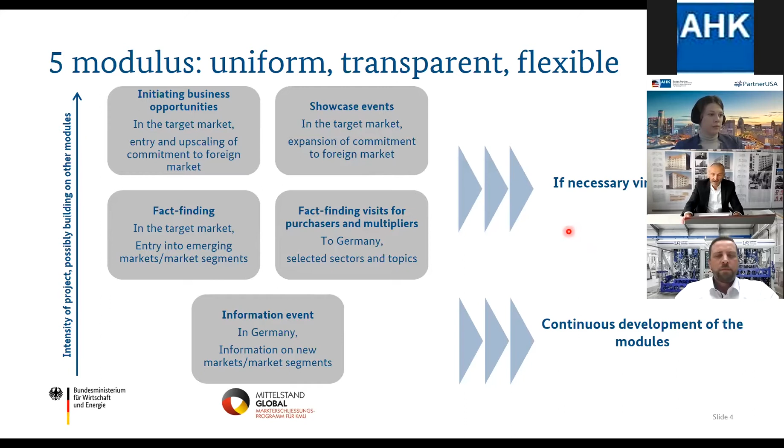If you have more interest, if you have more questions on that program, please feel free to get into contact with my colleagues in the 2 offices, and it will be a pleasure for them to help you and to give you the required information.

So let's move on to the second part of my presentation. Now it's about lightweighting, the major part of the presentation. Of course, the Corona crisis is the overwhelming event for all of us in the US, in Germany, all over the world. But there are still other global trends, global challenges we are facing, and we have to tackle them, because they give us huge opportunities, especially regarding lightweighting.

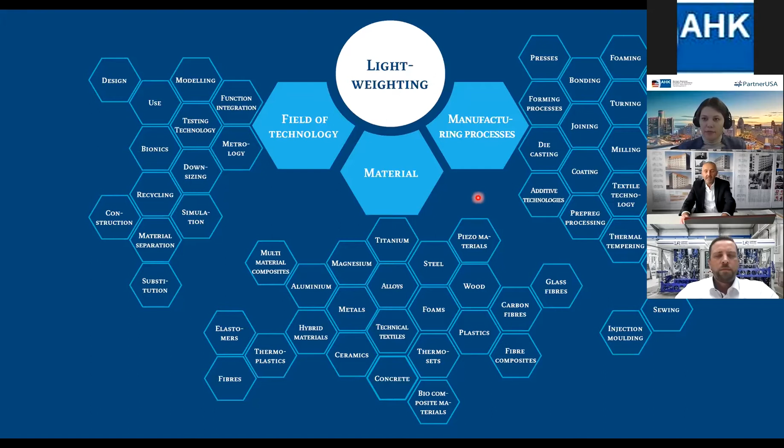So bringing all these different stakeholders together with the different backgrounds they bring in, that's not a self-fulfilling story or promise. Hard work is needed to be done. And that's what we have done in the last years in our ministry, setting up that specific network in the field of lightweighting. So we have established the lightweighting initiative.

So the first element is the strategy group, and that body consists of different representatives of the Länder Lightweighting Organizations - there are 16, because in Germany we have 16 states - and they send one representative to Berlin, so they bring in a lot of knowledge and experience in the field of lightweighting. What is as well very important is that with these guys from the state level we have the opportunity to combine the federal and the state level, which is very important for us.

On the other side, you find the representatives of industry, unions, and associations, and they bring in knowledge and experience in the field of lightweighting, representing the different materials we use in the field of lightweighting - composites, steel, wood, aluminum - all that is represented here. So we have the chance to build up an idea of a hybrid, a multi-material lightweight. Yes, of course, it is a broad and complex structure, but typical for a cross-cutting industry. What is more important is that we have a strong, solid base for our political work, and that works very successfully, very well.

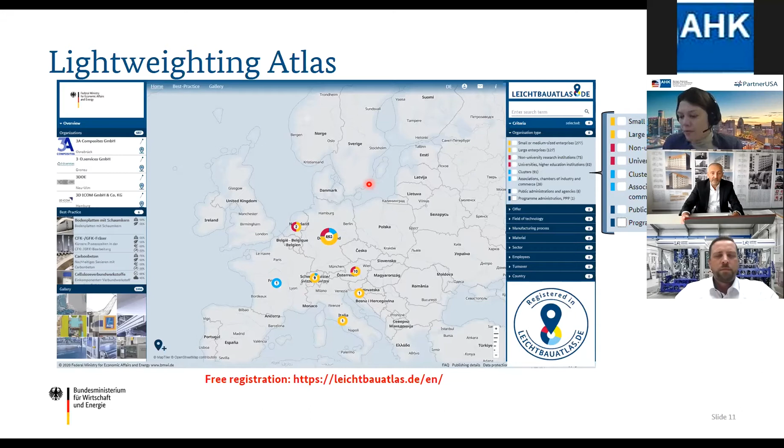The next element is a very important one: the lightweighting strategy. Our goal is to create a strategy from the economy for the economy. We set up different elements and involved about 350 experts from industry and research in this bottom-up process. We held 3 workshops and 1 final conference, which went very well — at the first workshop around 300 experts from industry and research actively took part. We generated a lot of information and incentives, more than 600 ideas and impulses, and 42 very specific actions.

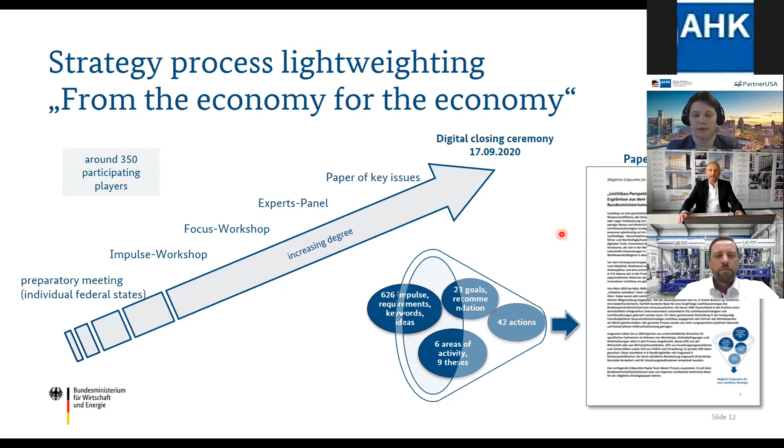The next element is, from my perspective, a milestone: a technology transfer program for lightweighting. It's a milestone because for the first time Germany has a funding program made only for lightweighting and new materials, on a very solid and strong financial base of 60 up to 70 million euros per year. There are 5 goals which are important for us.

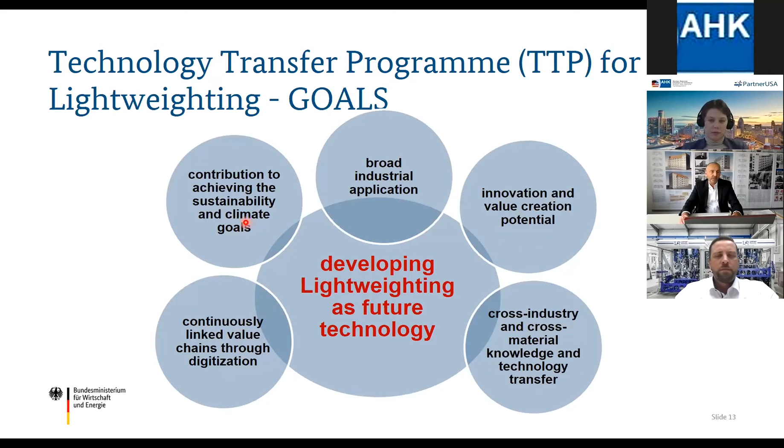The first goal is to bring lightweighting into broader industrial application. The next is about innovation and value creation potentials. The third is to support cross-industry and cross-material knowledge and technology transfer, typical for such a program. The fourth is setting up fully digitized and linked value chains. The last is an important political goal: contributing to achieving sustainability and climate goals.

So how do we achieve these goals? We have set up 5 funding lines, which you can find here. The important thing about the financing is that we get the money from 2 different financial sources. The first is, not surprisingly, the budget of our ministry, which provides 4 million euros per year, and that money goes into funding line 1, about technology development.

But the lion's share of the money comes from a second financial source, the Climate and Energy Fund of the government. That money goes into funding lines 2 and 3, CO2 savings and resource efficiency — we're talking about 60 up to 70 million euros per year. That shows, since the money comes from the climate fund, how important climate protection generally is, and how important it is specifically for the funding of this program.

There are 2 other important funding lines you can find here, for demonstration projects and standardizations. There is no additional money available for those, but they have to be able to assign to funding lines 1, 2, and 3.

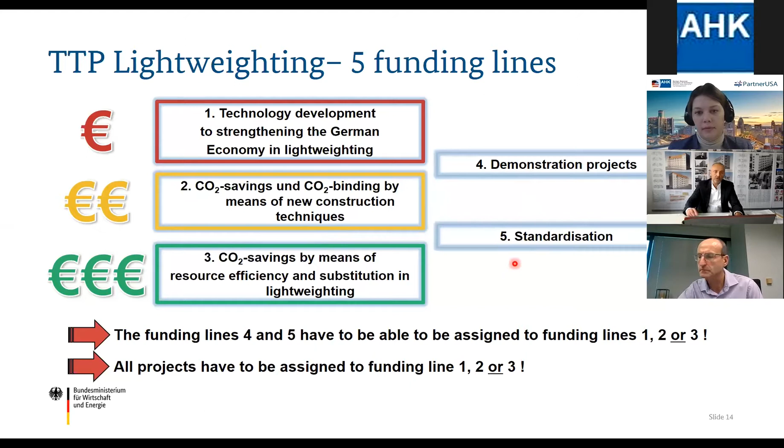So, who can be funded? Yes, more or less anybody who has a permanent establishment or branch in Germany. It is open for companies, universities, and non-profit organizations with a permanent establishment in Germany, and they can be funded for individual and collaborative projects. If you like to join our funding program as an American organization or company, it is possible, but if you have no permanent establishment here in Germany, you can't receive any funding from us.

So let me sum it up: that is a very successful and helpful funding instrument for us, and there's a huge demand to get funded from that program, so we are very happy to have it.

Let's have a look at the international level, because lightweighting is an international challenge at the end of the day. We have to improve our networking on European and international level. The first initiative I want to introduce is the first meeting of the European Lightweighting Network. That is an initiative of our ministry under the framework of the EU Council presidency of Germany, on the 26th of November. The idea is to bring together different stakeholders from business, research, the European Commission, and the different ministries in member states in Europe responsible for lightweighting. We think that's a good idea to improve networking in Europe.

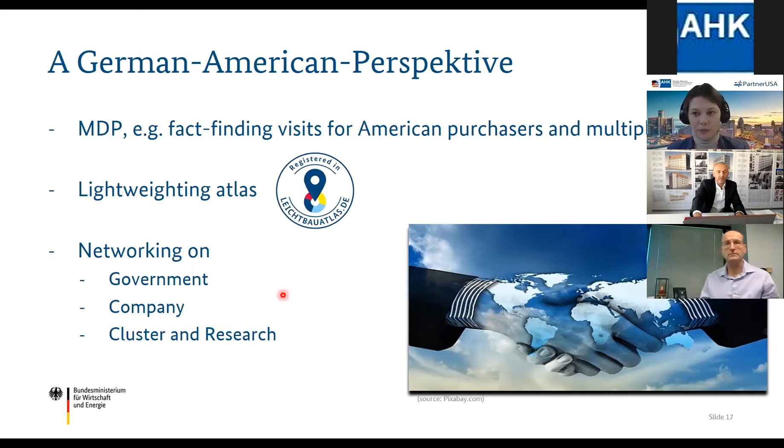So finally, let me sum it up. For us, lightweighting is a game changer technology that is important for improving, strengthening, and modernizing our industrial sector in a sustainable way. Let me illustrate that with the lightweighting principle: less weight, less energy, lower emissions, greater functionality, and better resource efficiency.

So those are the opportunities, but on the other hand, there are still some challenges we are facing. The first is that we have to establish fully digitized and connected value chains with the required lightweighting expertise on every level. The second is about reducing cost, especially for the automotive sector, but that's important for every sector as well. The third is setting up suitability for mass production, and the last is establishing sophisticated recycling processes, especially for multi-material lightweighting. That is important because we have to secure the acceptance of society and politics, so that environmental issue is important.

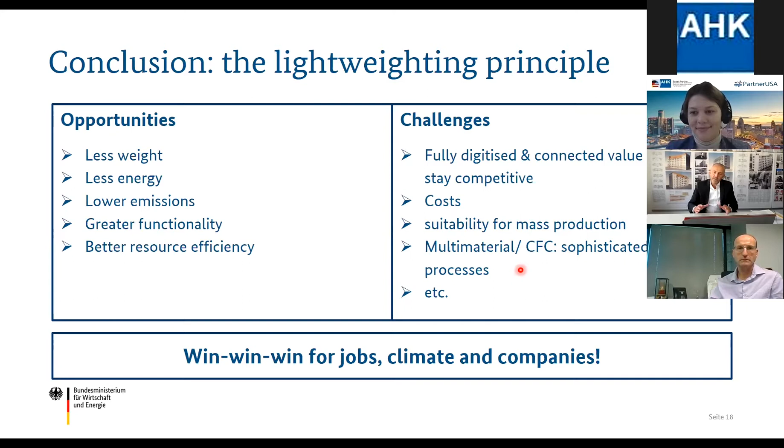And if we do so, and I'm pretty sure we will, then lightweighting is a win-win-win technology for jobs, climate, and companies. If you have more questions concerning the technology transfer program for lightweighting or the lightweighting initiative, please get in contact with my colleagues. It's a pleasure for them to help you.

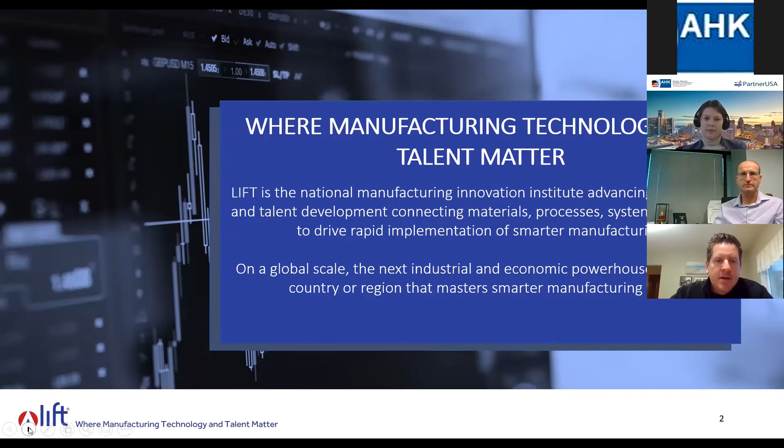So we view it as solving the manufacturing equation: materials, processes, and systems, plus the talent required to make it all happen. We understand that we cannot have the technology without the talent to work on it and drive it, and we can't have the talent there without the technology to work on.

So we operate really in 2 different programs at LIFT. The first is Lightweight Innovations for Tomorrow, that is our technology program in which we are taking technology innovations from the lab concept to the marketplace, into industry and into the hands of our men and women in the military.

We also have Learning Innovations for Tomorrow, which is our talent side, where we're really trying to expose the future careers of advanced manufacturing to our students across the curricula, the continuum, from high school and K-12 students, to folks looking to earn a certification, to returning men and women from the military to support them as they transition back into a civilian career.

So I mentioned that we focus on taking innovations from concept to production ready, and that's really where we live, the so-called valley of death between MRL4 and MRL7.

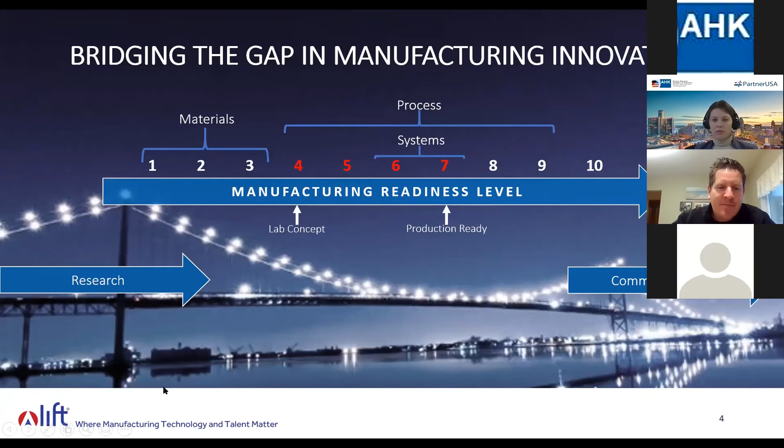We know that there's a lot of investment in research that takes place on the 1 to 3 side, happens at universities, happens at national labs, and they get to a point where they've seen some success in the lab, but then the funding dries out and isn't readily available again until it gets more ready for production into the marketplace. So we are helping shepherd those innovations across that valley of death to really bridge the gap in manufacturing innovation. So we are there between 4 and 7.

So I mentioned we are a public-private partnership, and much like Werner's presentation, we are a membership-based organization, obviously focused on the United States. Some of the things he said about German requirements, we have the same requirements as it relates to members in the US. You must either be based in the US to be a member, or have production facilities here in the US, to become a LIFT member and receive some of the funding that we're able to flow down to get some of these projects underway.

In terms of what we do for our members, we are a trusted advisor. We're not playing favorites in terms of what technology we're recommending or how we work with our members. We have experts across the country in a variety of industries, both in-house and across our ecosystem. We try to provide the best advice and direction to help particularly small and medium-sized manufacturers move in that direction.

I mentioned we're a talent developer. So we have a LIFT Learning Lab in our facility. It's unique in that it's not in a school or a community college, it's perched above our high bay facility.

Before the pandemic hit, and I hope everyone is safe and well and staying healthy throughout this pandemic, we had 120 to 150 students going through our program through our LIFT Learning Lab.

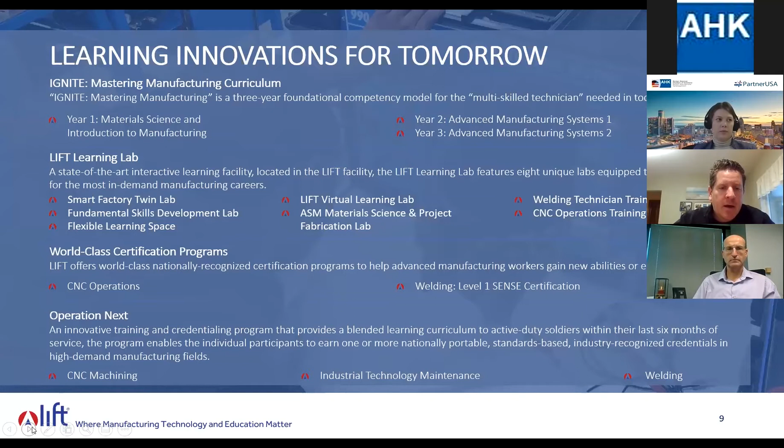Finally, Operation Next is a program we developed. This is very much US specific, to help our active duty men and women in the military as they get ready to leave the service—in the last 6 months they're able to earn a certification, making it easier to find a civilian job in advanced manufacturing. As we go through the pandemic, we just announced earlier this week that we're taking this program out of the military and into industry for the first time, to help small and medium-sized manufacturers, starting here in Detroit and in Pittsburgh, provide training opportunities for their workers so those folks can get back off the ground regaining from the pandemic.

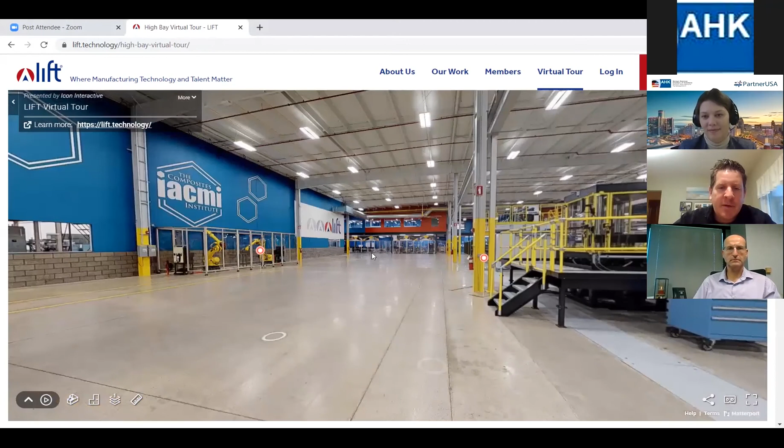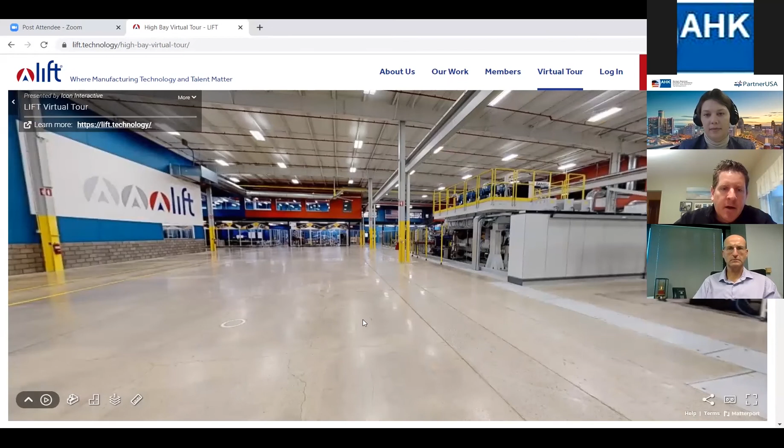This is our facility shared with our friends at IACMI, and as I mentioned, we are really process driven here. But come back in about a year and we'll show you a lot of new materials and new processes happening here, particularly in this middle area we left open specifically. We've got big plans for this area, but you'll see we have a large extrusion press down here, working on things like incremental sheet forming, as I mentioned, smarter, agile manufacturing.

Incremental sheet forming is certainly one of those where, instead of investing in a large forming press, couldn't we be more agile? Couldn't we be smarter by programming a robot to essentially make the shapes, the pieces that we're looking for? So you program the robot over time, and it can form a shape, form a piece.

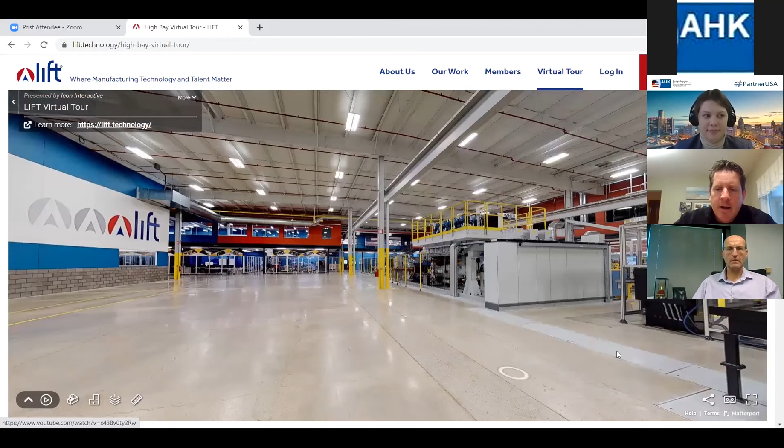We do have a traditional forming press over here—you guys are probably familiar with forming presses—but I do want to show you two more things in the brief time I have left as I walk down our facility. Again, this area will be evolving.

I want to show you this is our robotic cell, which has 4 large welding robots in there. But what we're using it for is wire arc additive manufacturing, as I mentioned. We want to see if we can't take additive and bring it into use with welding arms. See the arm laying down different beads of weld—we can then machine those down into a particular shape, and then we have a piece. We're working on characterizing those now, working with our friends across the state and across the country on that.

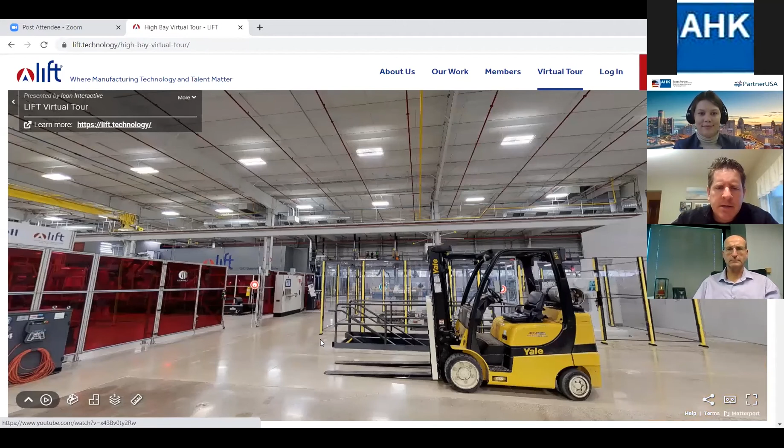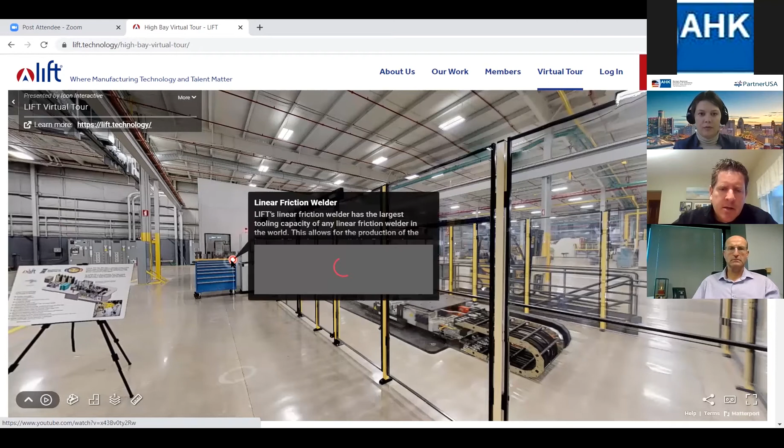Finally, we talked about dissimilar materials. I want to show you, we have the world's largest linear friction welder here, really helpful in joining dissimilar materials. This machine is able to use heat and friction to weld a piece together. It holds one piece of material steady while, imagine rubbing your hands together, you'll generate heat and friction.

It'll generate that heat, and with 75 tons of pressure, we're able to weld them together. You see the one piece being entered in there, being put into place and cleaned up, and we'll have a weld coming up here very shortly. But very important in joining dissimilar materials.

Very strong welds. This is used in the aerospace industry, as you guys probably know. We're proud to have this machine here at our facility, one of the only ones available for R&D purposes. And here's a weld coming up. And there you go, it doesn't take very long at all.

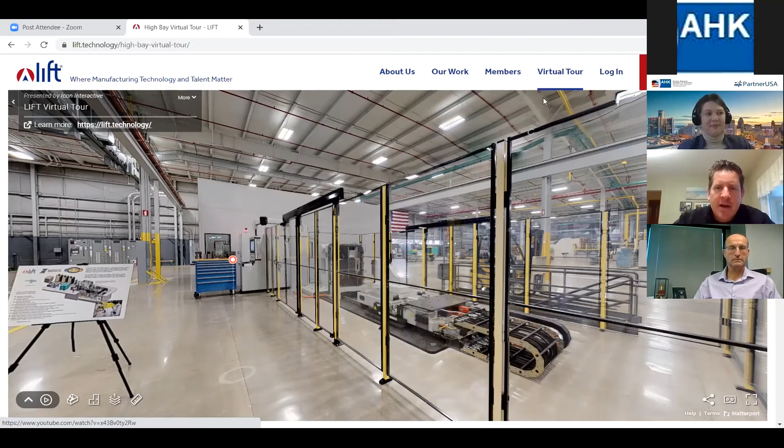Thank you, Joe. Yeah, I think your presentation really highlighted the support and network that LIFT can offer to drive advancement in the industry and really address those challenges.

I actually do have a question from the audience for you. The question was, how best can upstream material technology and producer companies get involved with LIFT? That is a great question. We have a variety of membership levels, so it really depends on the size of the company, where they operate.

So I'd be happy to take that question offline, or if you can connect me, Brooke, that'd be great. We'd be happy to do that. We have everything from platinum levels to startup levels, so it really depends on where you are in your industry and how large you are. Happy to work with folks.

Yeah, it sounds like no matter where you are in the value chain, LIFT can offer some sort of support in your technology and advancement. We want to make sure that the supply chain is robust and healthy, and that means connecting the large companies with the small companies, because innovation really happens at the small companies, and we like making those connections. Understood, thank you so much.

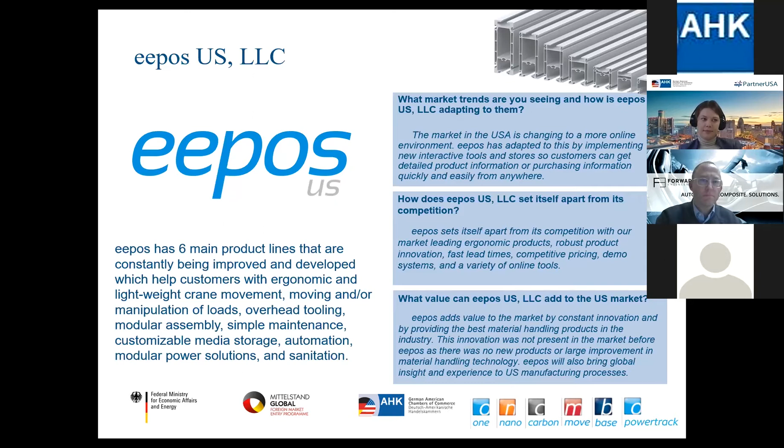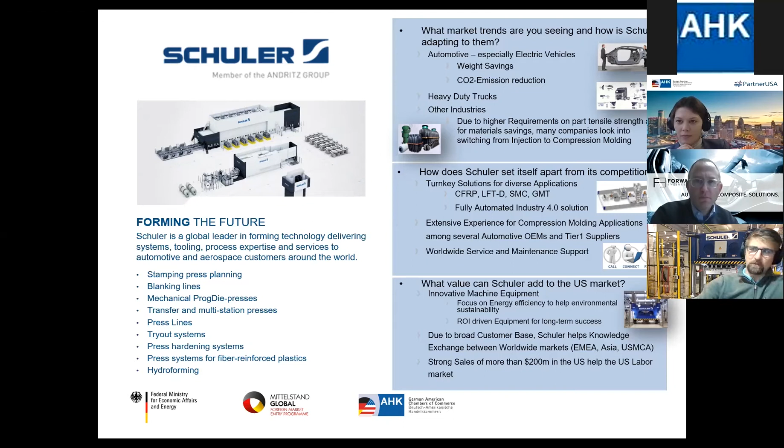We just finished the project very successfully and are happy to introduce in the future the new Industry 4.0 solution from SCHULER. So I tried to make it short. Thank you very much, Adam.

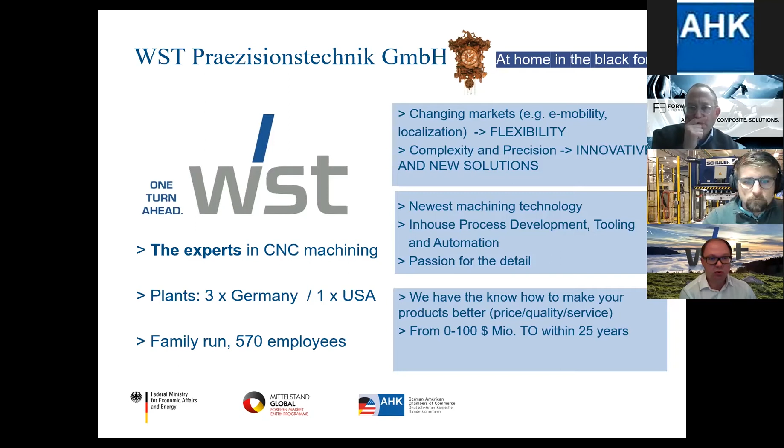We also have the passion for detail - I think it's also about people, that's quite important. What we bring to the US market - we don't have our own product, so what we can do is make your products better: price-wise, quality-wise, service-wise. That's what we can do. The company isn't too old, 25 years, and we went from 0 to 100 million, so we have a proven track record.

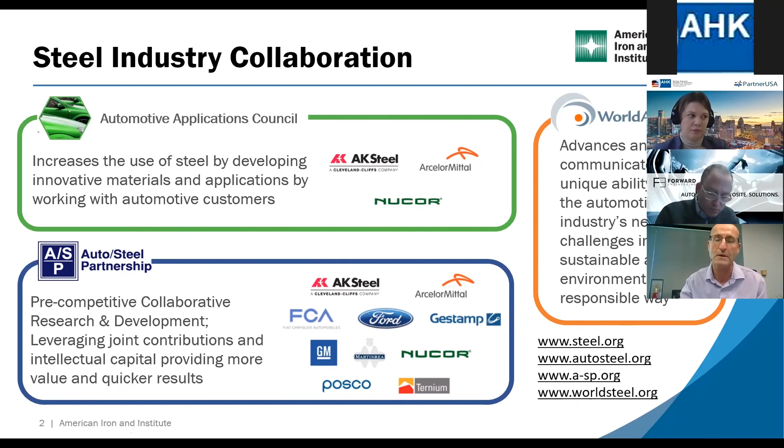We can't talk about lightweighting without touching on the future. Here we think steel has a good role in electrified and future mobility, that's the autonomous vehicles. Through those organizations you saw on the previous page, steel has had a long success of partnering with its global automotive partners. Some of you may remember the ultralight steel auto body, that was in the mid-90s.

I actually worked on that. And then future steel vehicle, and that wrapped up in the 2015 timeframe.

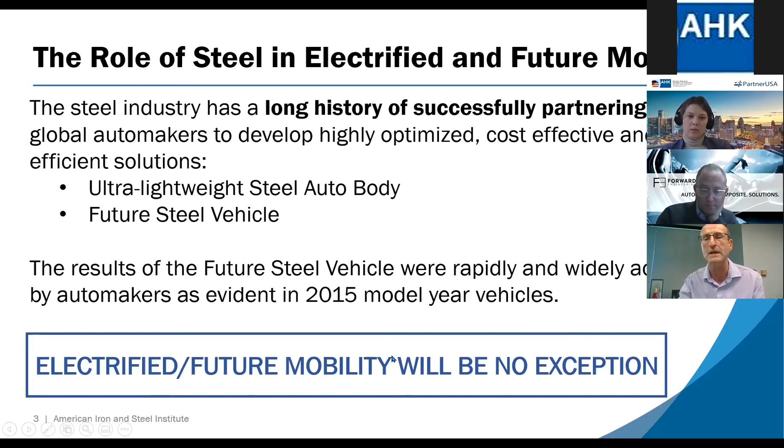So I've got some examples of lightweighting ideas that came from future steel vehicle and went into actual production vehicles. We've had a lot of success of our concepts, innovations, ideas, and materials getting into production vehicles, and that's key. Also, the electrified and future mobility will be no exception, and World Auto Steel is looking into what the future means for steel when it comes to electrified and future mobility.

So there's some big numbers. This has been a general trend in all of automotive anyway.

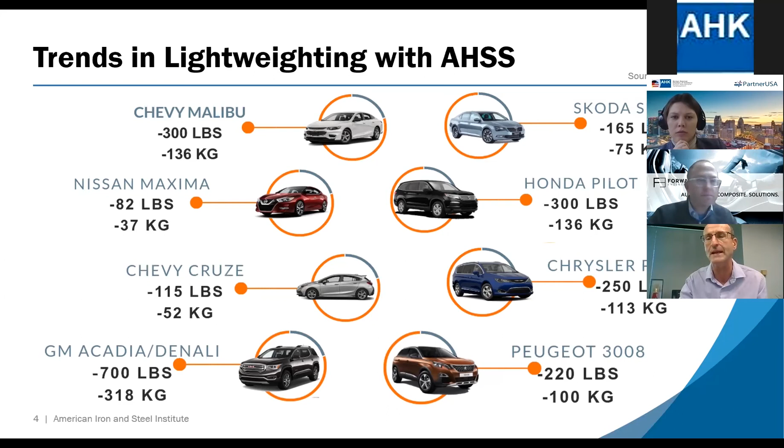These are studies performed by Ducker Frontier. They've done studies for us in the steel industry, and they also do it for the Aluminum Association. They basically average the mass curb weight of a vehicle in North America, averaging those small cars all the way up to the full-size truck.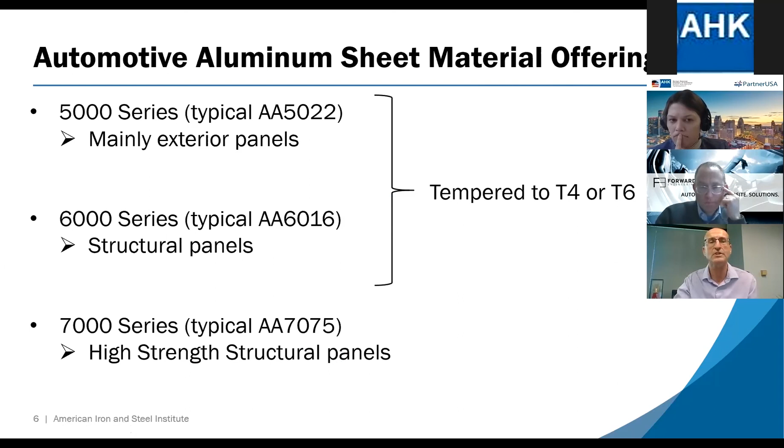And then the most recent introduction when it comes to aluminum—these have been extrusions, and there's been some sheet as well—is the 7,000 series. A typical number is 7075, and that's your high-strength structural panels. Now, this ends up with some welding issues, not a dissimilar issue to what we have with steels. So you can see the three main offerings in aluminum, as I would say.

Now, when we move over to steel, you see that there's a much wider range of grades and offerings. And actually, I haven't listed all the different strengths—there's a number of strengths within these bands. There's over 200 sheet steel grades now available for automotive usage. So the advantage steel's been having is it's got this much broader range of offerings.

Now, what happened with steels is as they went stronger and stronger, there was a loss of ductility, so the right side of this chart shows that loss of ductility. To handle that, we got into the press hardened steels—now you hot form those, giving you the ability to make a complex part and still have ultra high strength.

However, in recent times—the last 2 or 3 years—the retained austenite steels, which are actually the third-gen advanced high strength steels, have come online. That's an attempt to have a very high strength steel part, but be able to cold form it.

So you can see that lightweighting in steel is going to remain a force moving forward because it continues to produce products. Working with our customer base, they've told us they need these higher strength materials, but we still want to be able to cold form them moving forward.

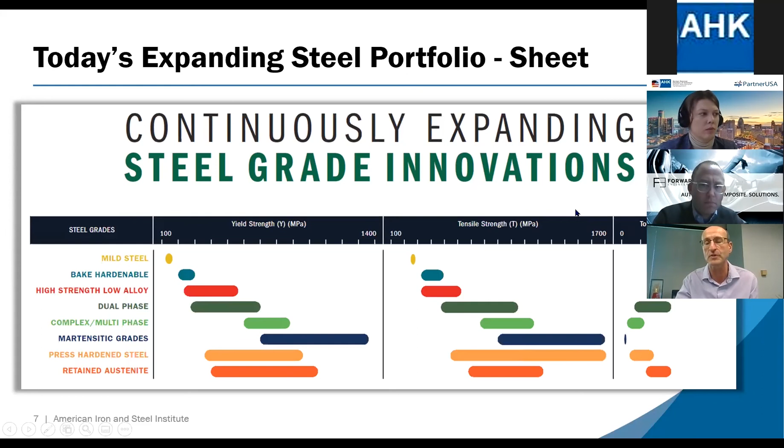So it's one thing having the materials, but what you have to do is help your customer base and your supply base apply those materials in manufacturing. So through the Auto Steel Partnership, that's where we do a lot of projects to work on formability and spring back, for example. There's actually teams working on the ability to predict the spring back.

So you have to have accurate material models to do that. And then what kind of measures can you have to basically reduce the amount of spring back you get in a part? It's no different than castings that spring and need straightening. But what you can do in steel is you don't do any post correction - you do that actually in the dies themselves. So we've got a lot of work going on there.

And then as you get to the richer chemistries of the high strength steels, during joining - which is predominantly spot welding in a lot of the car bodies - you can get liquid metal embrittlement. You can form cracks in the metal. So we've actually got projects looking at testing the materials to see if they're susceptible to the LME, and then working on countermeasures to reduce the effect of LME. You get the liquid metal embrittlement when you have a coated material, which you need for automotive for corrosion protection.

Just a couple of other things that the Auto Steel Partnership has been working on: they've also been working on mixed material joining. I heard that earlier - they did a study where they joined steel to aluminum. They're working on alternate joining systems, even to the point of maybe using self-piercing rivets to join the high-strength materials, because a fusion welding process can actually reduce the properties of materials. So perhaps a self-piercing rivet gives you a better joint at the end of the day.

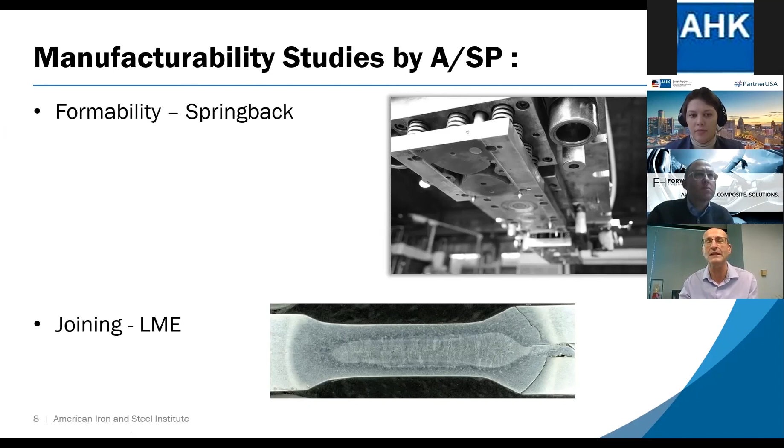So I just want to say, while everybody's on the line here, if you've got a presence in North America, you can actually participate in Auto Steel Partnership projects. I know we've worked with press companies in the past, we've worked with supply base, so you can actually get involved in some of the projects directly. So if you have an interest, make sure you get in contact with me.

And then moving forward, I just want to talk about some of the challenges that are going to come with these forward-looking vehicles and innovative vehicles. You've probably seen a lot of concepts that eliminate the B pillar, so you can get out of these autonomous vehicles and ride-sharing vehicles easier. That is going to present huge challenges of making this door ring very strong. We think that steel can do a good job of providing that strong safety cage around that door opening.

Battery packaging, that's a big job for all materials. We've seen execution of battery packs in aluminum, we're seeing them in steel as well. They'll typically go in the floor here. The challenges are that you cannot have any deformation of these battery packs, or the cells can become compromised. And that can lead to obviously loss of performance and perhaps even a thermal event, as we call it.

And then moving forward, with these future vehicles, they're going after lightweighting efficiently. And when I say efficient lightweighting, it's got to be cost effective as well. I think we heard that a couple of times this morning. Automotive is driven by cost. So if you can achieve your lightweighting goals through a lower cost application and a mass efficient and cost efficient application of steels, you might see a lot of companies doing that.

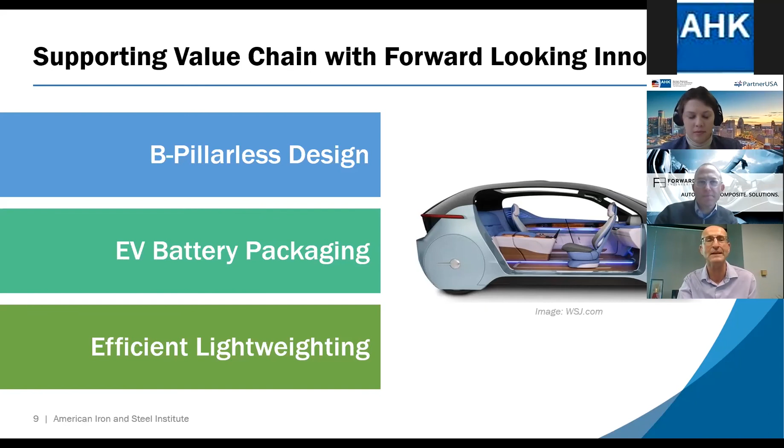Yes, there are a couple questions. The first one is, what is your latest news on the new Steel International in Ohio? They wanted to build one of the most innovative and eco-friendly steel mills with many new technologies, including hydroforming.

Is that you're referring to the actual steel making itself, or them going downstream with the processing? You know, both. So yeah, that question for me, John Paul here. Yeah, so both. So I know that they wanted to do the mill, and then they wanted to put in some new enabling technologies in there.

Yeah, so that is a trend in the whole industry. The whole steel industry, they want to go towards carbon neutral. So the big push for steel moving forward is going to be sustainability, energy efficiency, and they're going to want to move towards carbon neutral.

Now, you're probably aware other material companies have tried to go up the supply chain as well by making tailor welded blanks, hydroform parts. It's happened in other materials like aluminum as well. It usually has like a 50-50 success rate. You're probably aware of this a little bit. ThyssenKrupp is another example of maybe going up the food chain, then pulling back.